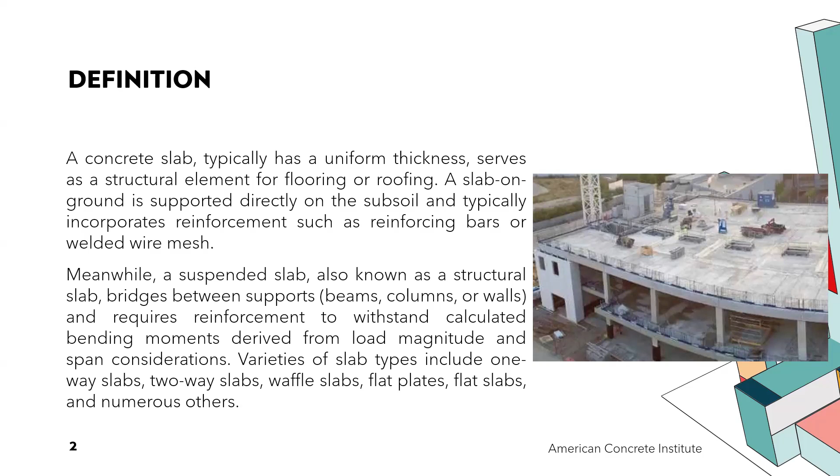There are two major categories of slab based on the transfer of forces from the slab to the beam, and it occurs either in one way or two ways. This is based on the geometrical dimensions of your slab. A slab may also be supported by columns only, and in this case, two-way action will prevail.

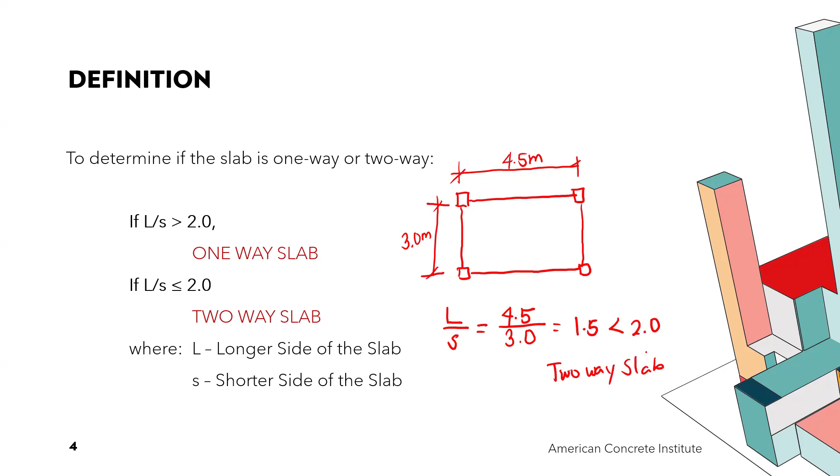Okay, so ganyan natin siya dinedetermine. And about this load transfer from the slab papunta sa beam is ganito. Again, triangular sa ating shorter side, and trapezoidal naman papunta sa longer side. Okay? So this is what we call our two-way slab.

So very simple yung ating pag-determine kung one-way or two-way. So after knowing this, I think we can proceed now with the designing of our slab. So pag design natin yung slab, there is a difference between the two, sa one-way natin and then two-way. So we will start in the designing of one-way slab.

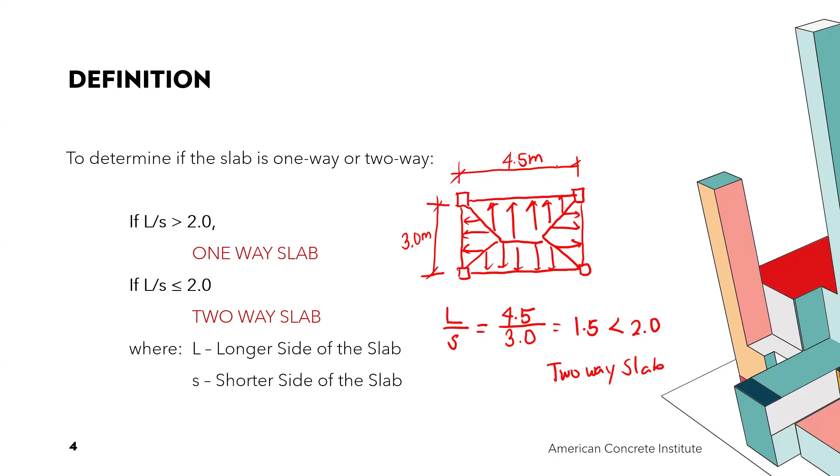Here is the general steps in designing of one-way slab. Number one, first is we need to compute the designing moment or Mu. This will be the most important parameter that we need to compute so that we can design our slab. Of course, kasi if we don't have the moment, then we cannot design yung ating slab.

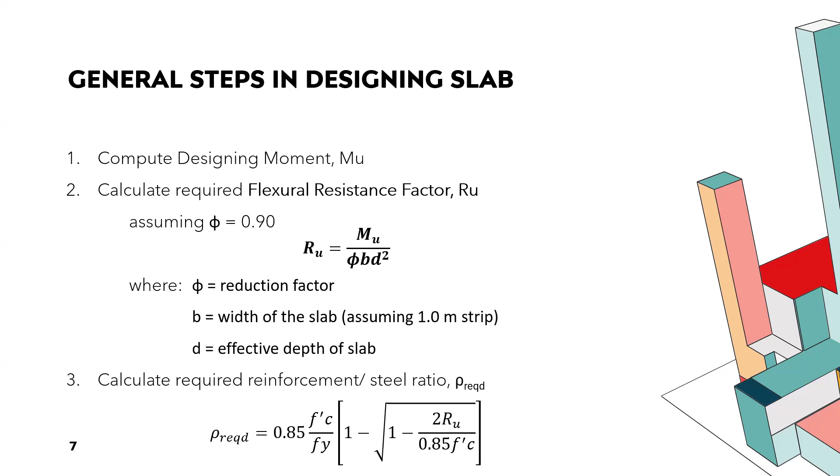Then after that, compute the required area of reinforcement, or yung As required natin. As required can be computed by multiplying yung rho required times yung ating width times the effective depth ng ating slab. Then compute the minimum area of reinforcement, As minimum.

So ang As minimum natin for one-way slab ay it depends on the type of reinforcement na gagamitin natin and also the value ng ating Fy. If Fy is less than 420 megapascal and we're using a deformed bar, so yung As minimum natin ay 0.0020 times Ag, o yung gross area ng ating slab. Considering yung gross area ng ating slab, we will consider 1 meter strip pa rin.

Then for the deformed bar or welded wire reinforcement, let's say greater than a stress of 420 megapascal, there are two As minimum, and kung yung mas malaki sa kanila, yun yung mag-governing as minimum reinforcement. So yung As minimum, yung una, that is 0.0018 times 420 megapascal times Ag divided by Fy, and other one is 0.0014 Ag. So if As required is greater than the As minimum, then we will use the As required.

Otherwise, use As minimum. Then after determining the area of reinforcement, we will compute now for the spacing ng ating reinforcement. So to compute the reinforcement spacing, that is Abar over As required, then multiply by 1,000. Then after determining the spacing, we can round off your value.

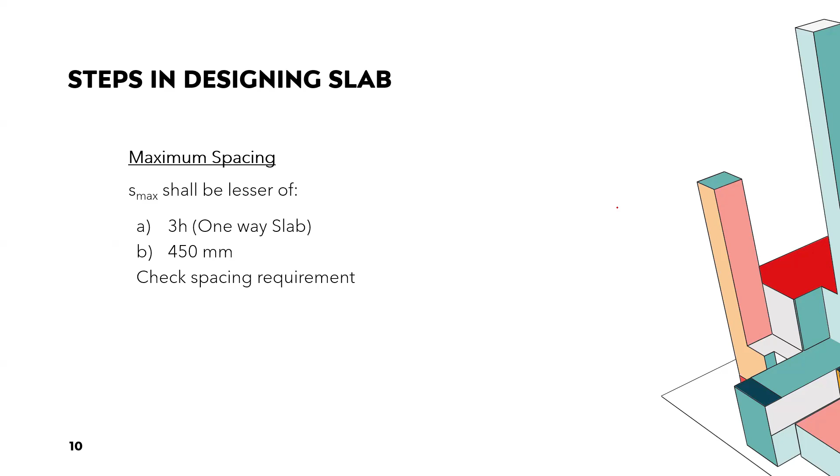Aside from that, since our reinforcement is along the direction of the bending of our slab, how about the longitudinal direction, parallel to the longer side? We need to provide minimum shrinkage and temperature reinforcement. This reinforcement is provided perpendicular to the main reinforcement of the one-way slab, with minimum ratios of the shrinkage and temperature reinforcement area to gross concrete area.

Actually, these are the same as our minimum reinforcement requirement for one-way slab. Commonly, we just use the minimum for shrinkage and temperature, unless we conduct analysis on the longitudinal direction of the one-way slab. But commonly that doesn't really happen, so we will just provide minimum reinforcement.

It depends on the diameter of your reinforcing steel bar, then from that we determine the required spacing. So after determining the minimum requirement of your reinforcement, we check its spacing, and the computation of the spacing will be the same as the previous criteria, similar to the main bar reinforcement.

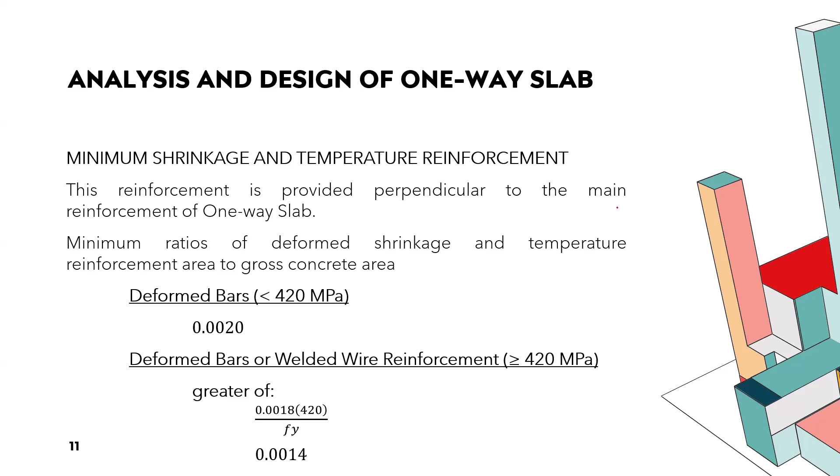Aside from designing the one-way slab, we will consider this to simplify the calculation of your design moment. Because it is very hard to compute the moment when dealing with slabs, especially if the slab dimensions are almost the same but there's a very small discrepancy between the width of the slabs and they are adjacent to each other. If we analyze it the way we learned from theory of structures, it becomes tedious and very difficult.

So NSCP provides us a simplified and approximate method of analysis of continuous beam and one-way slab. This is the requirement or the rules for using the NSCP coefficient method for continuous one-way slab. What we will design here is more focused on continuous one-way slab. It shall be permitted to calculate our Mu due to gravity load.

The gravity loads being referred to here are two: the dead load and the live load. So instead of using the analysis of continuous beams we learned in theory of structures, we will use this method instead. But make sure that the rules are satisfied before we conduct this NSCP coefficient method.

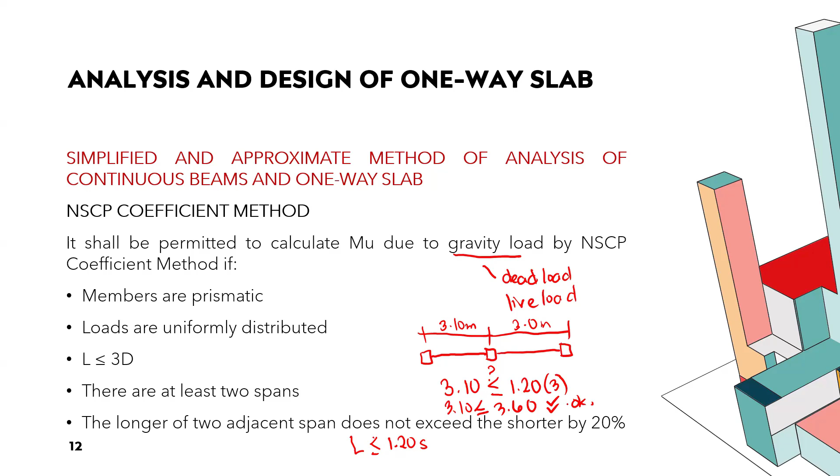Then here is the NSCP coefficients na gagamitin natin sa pag-calculate ng ating MU due to gravity loads. So in accordance with table 406.5.2 ng NSCP 2015, meron tayong two categories muna for the moment: positive and negative moment. Alam naman natin sa continuous beam, ang possibility ng ating moment ay ganito, parang curtain. So meron tayong positive na tinatawag at meron tayong negative moment.

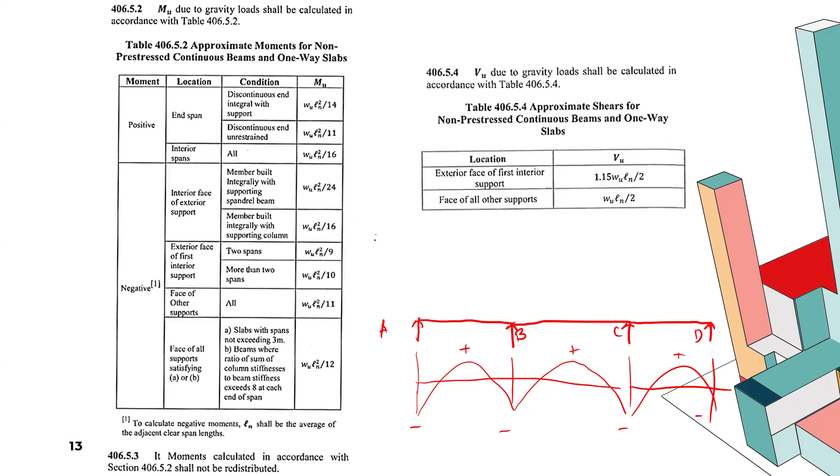Sa pag-calculate, una, sa positive moment, meron tayong dalawang kinoconsider na location: end span and interior span. Pagka sinabi nating end span, siya yung nasa outermost side ng ating continuous slab. For example, if I add one more slab here, let's say A, B, C, and then D. So masasabi natin na yung mga end span natin dito ay yung span AB and CD, sila yung nasa outermost side, itong AB at itong ating CD. Samakatuwid, yung BC naman natin ay interior span na siya.

Based sa condition ng kanilang support, pagka end span, sa end span lang naman meron tayong two criteria about the condition of the support. Una, discontinuous, at integral with support. Ibig sabihin, kasi sabi kasing integral is connected, meron connection between the support at yung ating slab based on their reinforcement. Kapag ganun yung ating design, so most probably ganun naman ang design natin, they are integral with the support. Yung ating slab is supported by the beam at yung ating reinforcement naman ay pinapakain doon sa ating beam, so therefore we will consider that integral with support. Pero pagka sinabing unrestrained, walang connection between the support at yung ating end span.

So yung gagamitin natin kapag integral with support ay WL squared divided by 14. Pagka unrestrained naman ay over 11. Then pagka interior span, sa lahat ng span, yung formula ng positive moment ay WL squared over 16. Okay, next dito tayo sa negative.

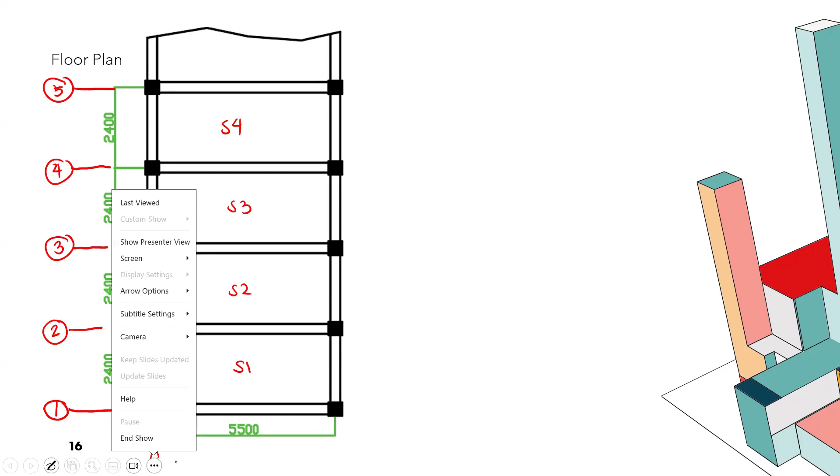So let's take a look sa ating floor plan. As you can see, this consists of many slabs. Let's name it as S1, slab 1, slab 2, slab 3, and slab 4. And let's create a grid here, naming grid A, or let's say grid B, or let's say grid 1 na lang. That is a conventional way of naming the grids of the framing of our floor plan. This is your grid 1, grid 2, grid 3, grid 4, and grid 5. And let's say this is your grid A, and this is grid B.

Okay, so first is we need to determine if it is really one-way slab or two-way slab. As you can see here, S1, S2, S3, S4 have the same dimension. So yung slab natin has a shorter side of equivalent of 2.4 meters, or let's say 2.5. Then for its longer side, it's equivalent to 5.5 meters. So to determine if it's one-way slab or two-way slab, let's check the value of L over S. Yung L natin is 5.5 divided by yung S natin na 2.4. So let's see if it is one-way slab or two-way. The value here is 2.29. So that is greater than the 2.0. So therefore, this is one-way slab talaga.

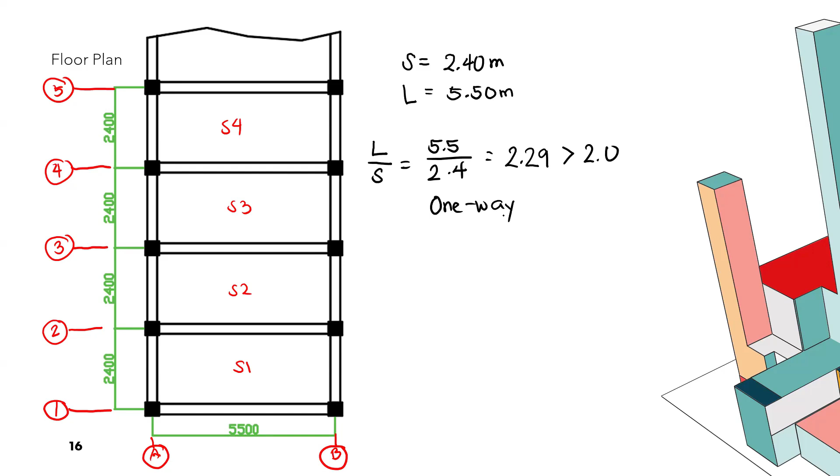Okay, next is, ang goal natin is to create a 1-meter strip, kasi yun yung ating magiging basis how to design yung ating one-way slab. So we will create a 1-meter strip that is parallel to shorter side. And since yung ating slab is a continuous one-way slab, so ganito siya. So mag-create tayo dito ng 1-meter strip.

Okay, and 1. So this is your 1 meter strip. Since this is a continuous beam, as you can see here in our floor plan, ito yung para magiging beam natin. This is the top view of your beam.

So if we try to draw it into a continuous one-way slab, ganito mag-itsura niya: 2, 3, 4, and 5. Ito yung 2.4, 2.4, 2.4, and 2.4. And ito yung frame 1, frame 2, frame 3, frame 4, and frame 5. So ganyan yung magiging longitudinal section niya, yung kanyang elevation, let's say elevation view, para mas maintindihan natin.

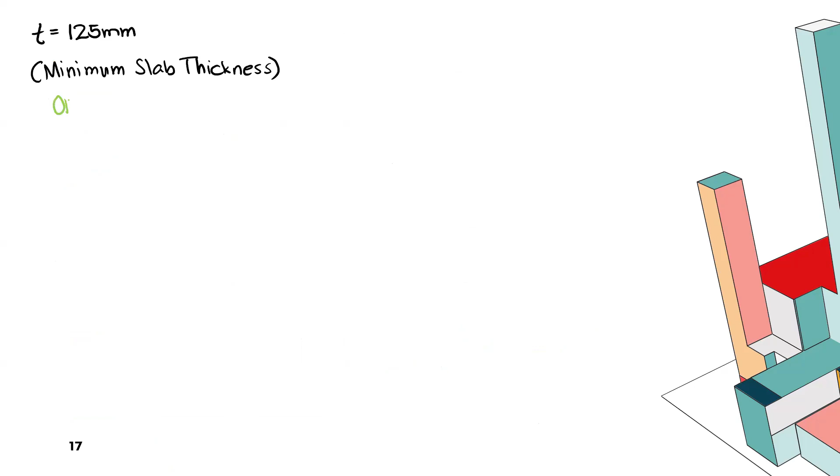So as you can see, there are two criteria dito sa ating slab, continuous slab. So we need to consider yung two conditions. Yung ating one end, ito yung S1 and S4. So dalawa, no? Dalawa yung ating one end continuous. Tsaka sa both end naman, dalawa din, no? S2 and S3 naman.

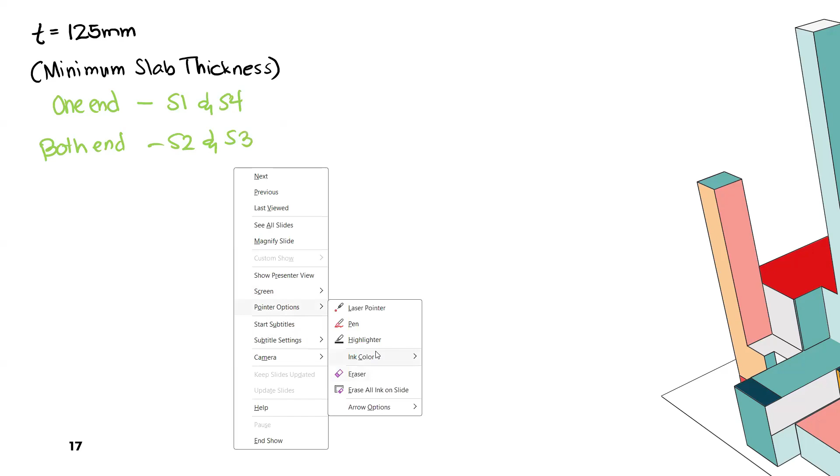So sabi natin, yung formula natin ay, balik tayo doon ulit sa code. Ang sabi natin, kapag one end continuous, that is L over 24, and then both end naman ay L over 28. Then sabi sa atin, this is applicable kapag ang Fy natin ay 420 megapascal. If you remember, yung ating Fy ay 415, so other than 420. So dito tayo pupunta. We need to multiply yung ating formula na to by this factor.

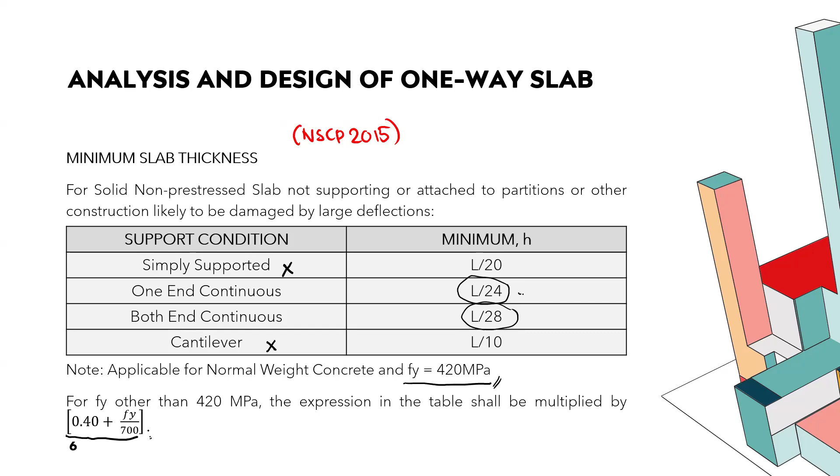Punta tayo dito, balik tayo dito sa ating calculation. Sabi natin yung minimum H dito, that is equivalent to L over 24. But since yung ating Fy natin ay 415 megapascal lang, mumultiply natin siya by 0.4 plus Fy over 700. So dito naman sa both end ay L over 28, times 0.4 plus Fy over 700.

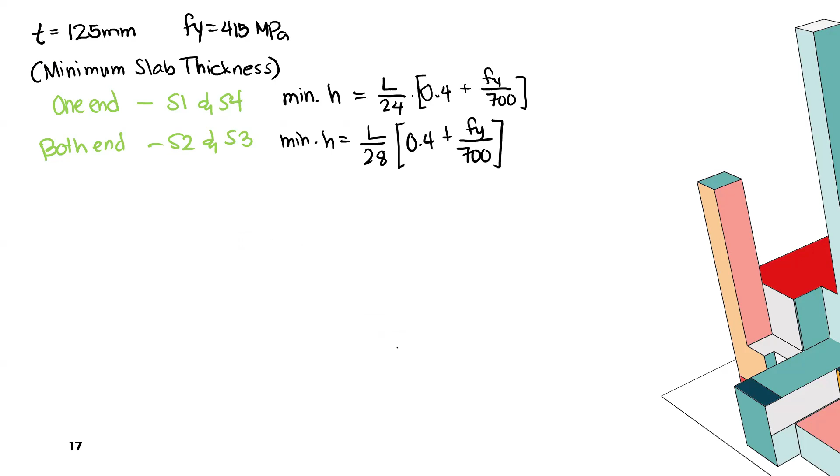Okay, next. Ano yung gagamitin nating L dyan? Yung L dyan na gagamitin natin ay ito ay clear span of the slab. So as you can see here, yung ating S1, S4, S2, S3 ay pare-pareho lang naman ng span. Yung span na tinutukoy is yung shorter side, ha? So lagyan natin na shorter side. Since pare-pareho lang naman yan, we can compute yung ating clear span of all our slab. So ganito ang pag-compute niyan.

So as you can see here, ang ating dimension is center to center of the beam. Dito siya sa center. Ang kailangan natin makuha is yung span natin dito, yung from the face of your beam support. Ibig sabihin, we need to deduct itong kalahati ng ating beam on both sides.

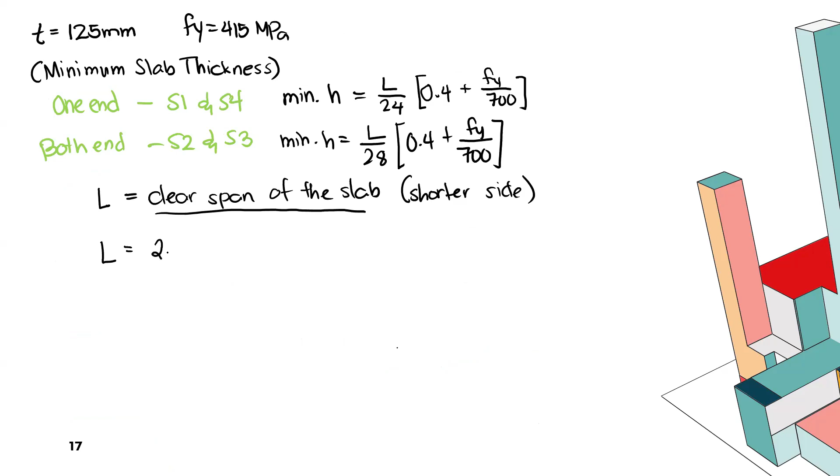So therefore, yung ating clear span, since pare-pareho yung span natin ng shorter side, yung ating center to center distance, that is 2.4 meters, di ba? Then minus yung kalahati ng beam natin. Saan ba yun? Di ba may given tayo na beam dimension sa ating problem? Yung cross-section niya is 300 mm by 500 mm. Kung titingnan natin yung floor plan, ito yung tinutukoy na 300 mm, that is the width of your beam.

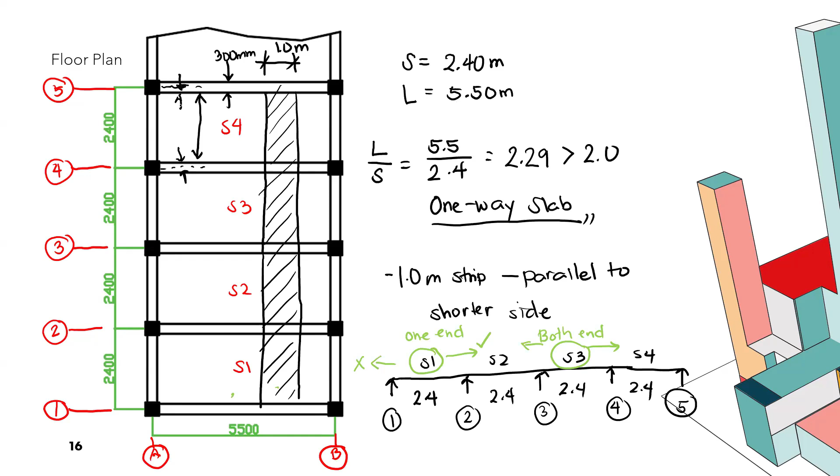So kung gagawin natin, kukunin natin yung clear span. Ima-minus natin yung dalawang half, dalawang kalahati, kasi center to center ito, di ba? Half ito, then on the other side ay half lang din. So 2 times half. Yung width ng beam natin is 0.3 meters, converted na siya, kasi 300 mm, yung ating beam dimension converted into 0.3 meters.

So, divided by 2. Two sides kasi, yung half, kaya ganyan. Pero to simplify, pwede nyo naman i-cancel yung 2, so just simply minus yung ating half width or yung width ng ating beam. Pero for the sake of correct calculation, ganito yung gagawin natin: yung ating clear span of the slab, that is 2.4 minus 2 times 0.3 divided by 2. So that is equivalent to 2.10 meters. Ito yung gagamitin natin for one end and both end.

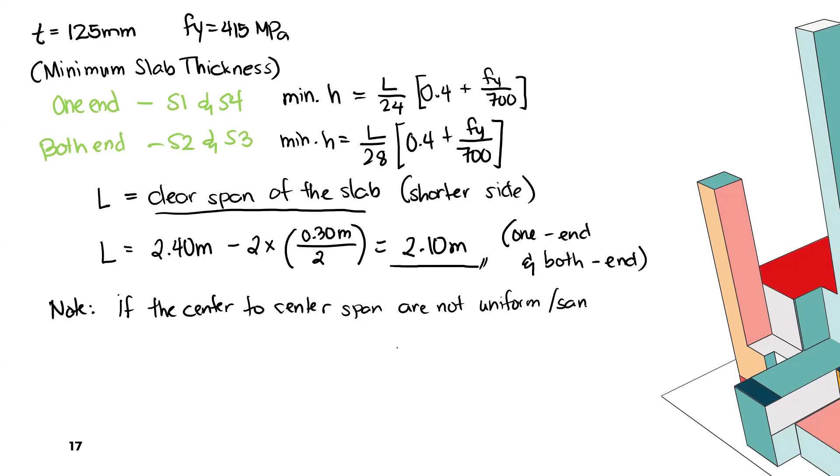How about, sir, kapag magkakaiba yung kanilang width? Magandang gawin dyan is use, lagyan natin ng note: if the center to center span are not uniform or same, use the higher value. Because higher value will give us a higher value of minimum. Kasi nga, yun ang gusto natin makuha, yung minimum slab thickness.

So let's check if papasa kaya siya o hindi. One end muna tayo. Compute natin yung one end, so that is equivalent to, yung H natin, gawin natin siyang mm: 2100 divided by 24 times 0.4 plus 415 divided by 700. So the value of the minimum thickness for one end is 2100 divided by 24, ito ay 86.875 mm. So very small lang, no? Minimum ito ha. Pero as you can see, yung ating actual thickness is 125. So minimum ito, so possible na pwede yan, yung 125.

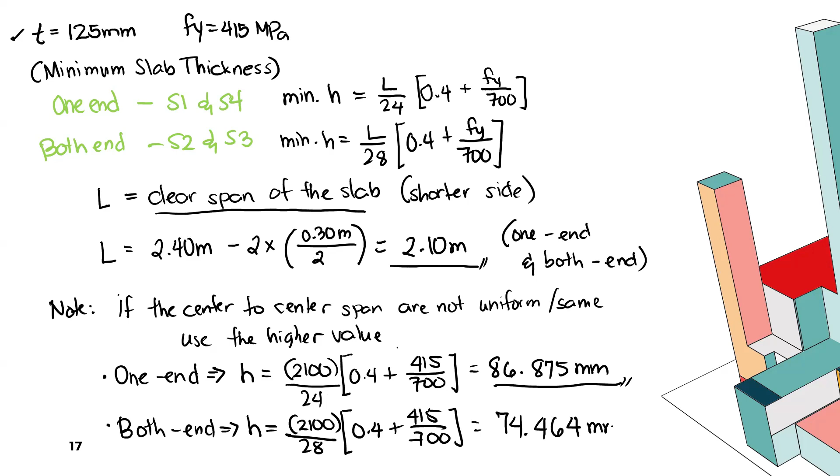Check naman natin yung both end. Baka sa both end naman magkatalo. Divided by 28 times 0.4 plus 415 over 700, let's see if there's some changes with the value. So this is 74.464 mm. Yung mag-govern sa atin na minimum dito, since dalawa yung value na minimum natin, ay yung pinakamataas. Mag-govern itong higher value. So therefore, lalagyan natin na yung minimum slab thickness is equivalent sa 86.875.

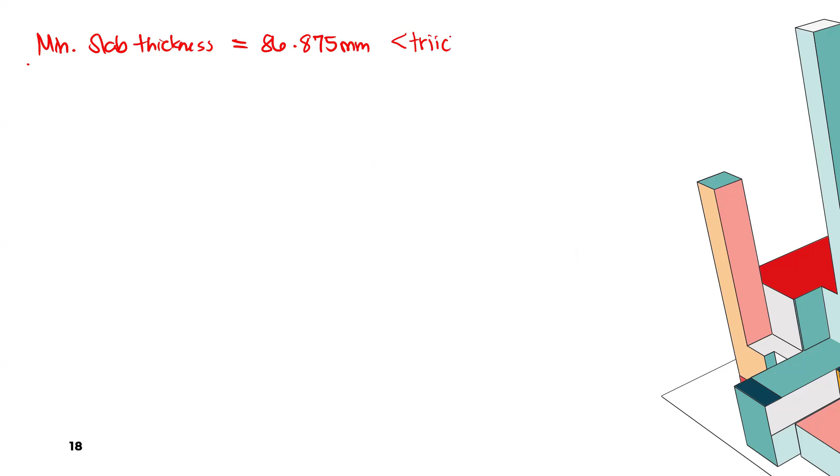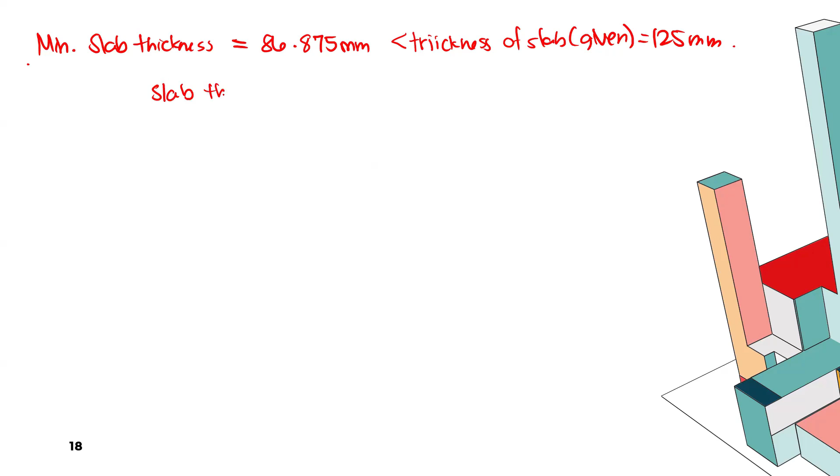And this is less than sa thickness, yung given na thickness ng slab natin. So wala naman tayong problema about sa thickness of slab yung given. Ito ay 125. So therefore, lagi natin, slab thickness, yung given, is adequate.

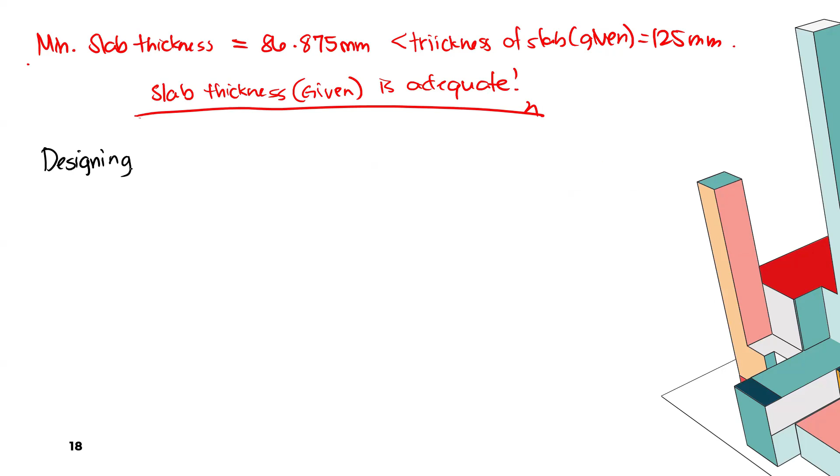Okay, so next, after natin dito sa pag-determine kung adequate ba yung thickness ng slab natin, then we can proceed now in the designing of one-way slab. Okay, in the designing of one-way slab, first, ano yung unang step natin? We need to compute designing moment, MU.

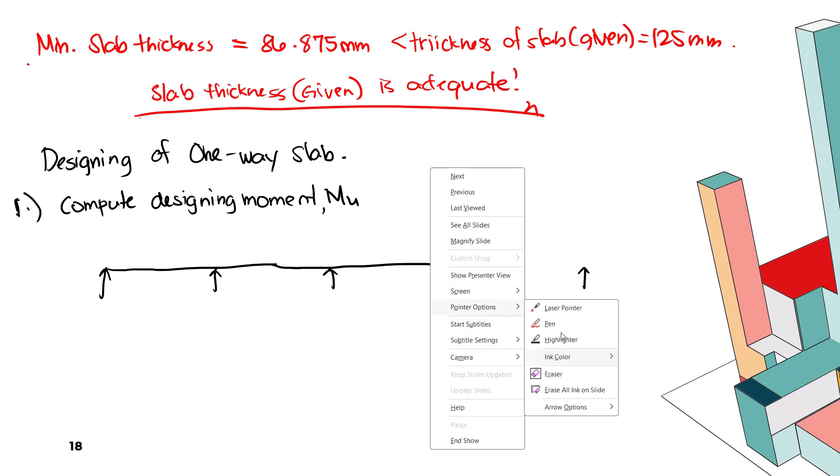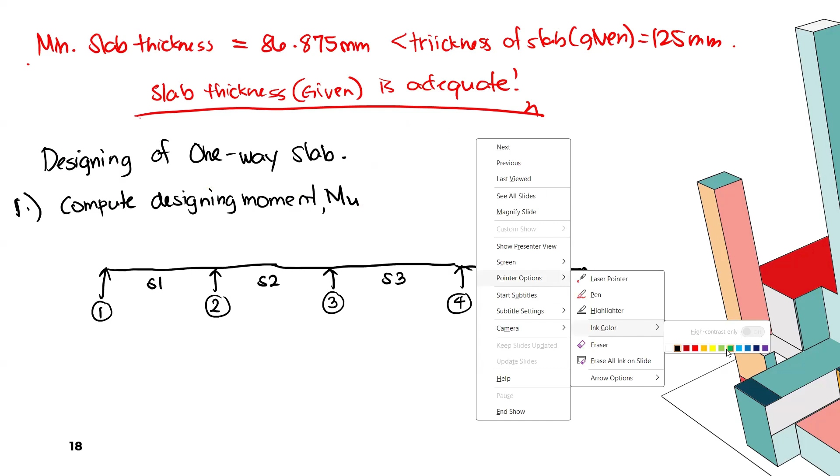Since we're dealing with a continuous one-way slab, let's draw continuous one-way slab. Drawing natin: this is here S1, S2, S3, and S4. This is your grid 1, grid 2, grid 3, grid 4, and grid 5. Next, yung kanilang dimension, lagay natin: this is 2.4, 2.4, 2.4, 2.4, that is center to center. Pero yung kanilang clear span, that is 2.1. So ito yung gagamitin natin pag-compute ng ating designing, yung ating clear span, hindi yung center to center. So this is just a guide para alam natin kung ano yung pinocompute natin.

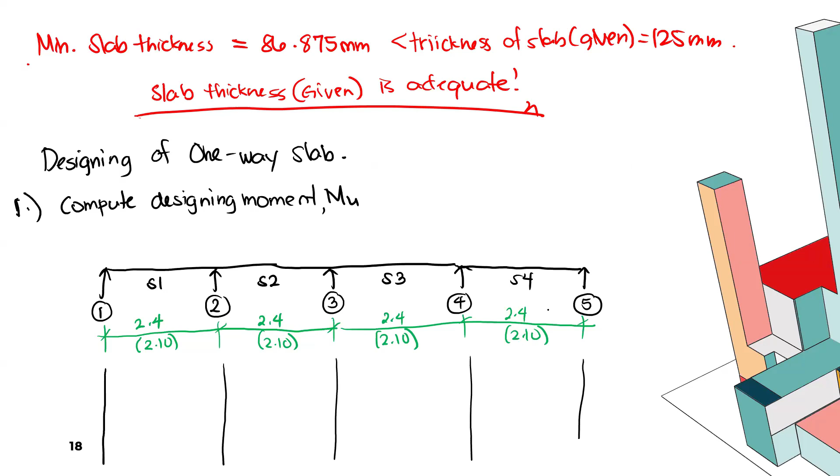Next is i-draw natin yung ating moment diagram. Ang gagamitin natin is NSCP coefficient. Ngayon, paano natin nasabi na pwede natin gamitin yung NSCP coefficient? Una muna ay pare-pareho naman siguro yung span nila. Pero di pa natin check yung iba, di ba? Una, prismatic, okay, pare-pareho yung span, okay. Di naman, wala namang longer side, walang shorter side sa ating span. So ang last na check na lang natin is yung ating dead load and live load. Pero for now, drawing muna natin ating moment diagram, assuming that yung ating beam is, yung ating end support ay integral, built integrally with our support. So ganyan yung ating magiging moment diagram.

Adjust lang natin para maganda yung tsura ng ating moment diagram. Ilalagay natin dito lahat ng ating diagram, yung ating mga moments. So, use natin dito, yan, and this one, and this one. Okay, ito yung ating moment diagram and pupunta na tayo doon sa ating coefficients.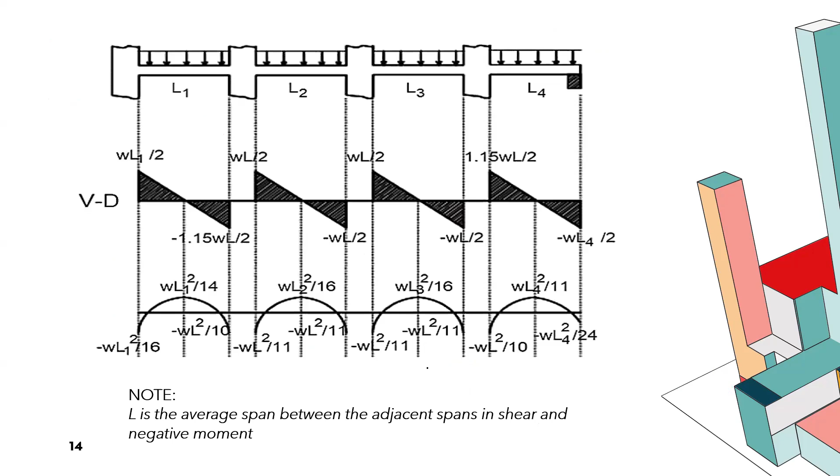Negative moment naman tayo. Una muna, interior face of the exterior support. So ito yung una, that is integrally with supporting spandrel beam. Commonly, beam naman yung ating support, no? So assuming that beam yung support natin, WL squared over 24 yung gamitin natin.

So ito yan, WL squared over 24. WL squared over 24, yan ha? Pareho naman yung exterior support.

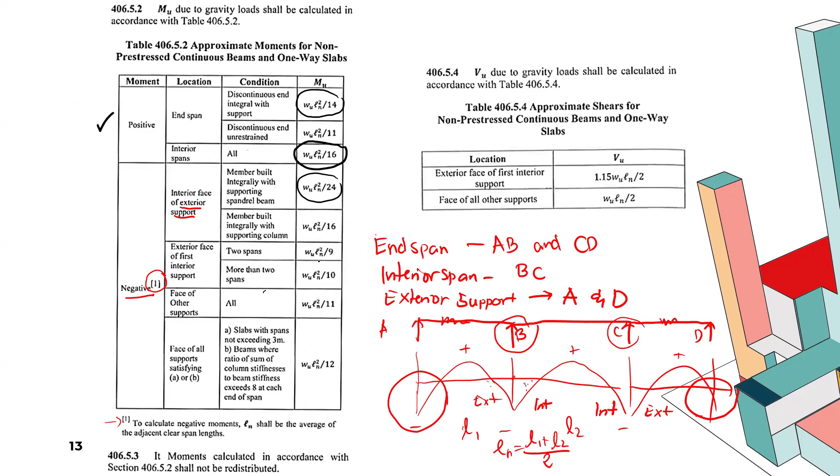Sabi naman dito, yung exterior face of the first interior support, 2 span, more than 2 span. So more than 2 span tayo, WL squared over 10. Lagyan natin, ito yan. Dito sa side na to, WL squared over 10, and WL squared over 10.

Face of other support, so WL squared over 11. Lahat na yan, no? The rest, tayo dito, may WL squared over 11. WL squared over 11, WL squared over 11, WL squared over 11. So yan.

Ito na yung magiging pinaka-formula natin, no, sa pag-compute ng ating designing moment. Ang gagawin natin, pipili tayo ng maximum positive and maximum negative moment. Then yun yung pag-design natin. But first, no,

Compute muna natin para mas maganda is compute muna natin yung ating W, kasi wala pa tayong W. Saan ba makukuha yung W natin? Okay, so yung W natin, let's say WU, that is a factored, uh, factored load. So makukuha yan by multiplying yung capital W natin times 1.0.

So ito yung 1 meter strip na tinutukoy ito. 1 meter strip, ito naman ay tinatawag nating pressure load. Ito yung mga given loads kanina sa ating problem. So we need to compute yung capital W natin.

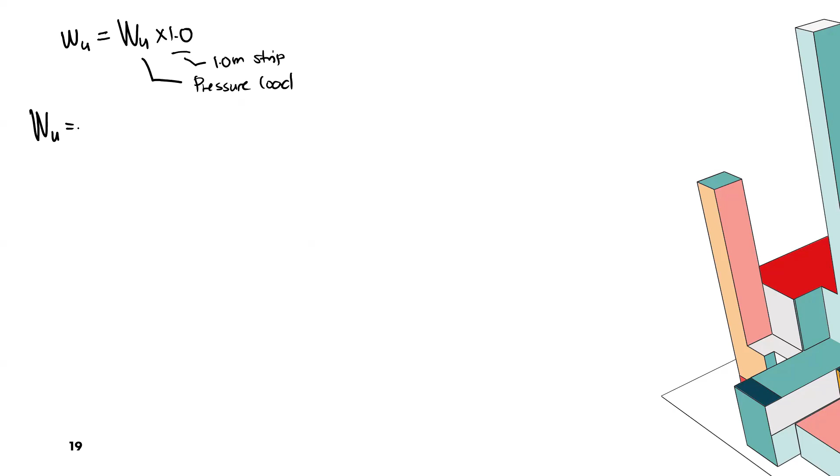Para mo compute to, mayroon tayong load combination ng 1.2 W dead load plus 1.6 of W live load. Since ang given naman sa atin ay dead load and live load, so yan yung load combination. So to compute muna, yung dead load muna natin.

Balikan natin yung problem. Sabi dito, slab is first floor office building. May live load tayo, 4.8 na, given na kagad. Then yung slab natin carrying ceiling system, interior wall partition, and floor finishes. So i-include natin yan, lagay natin dito ay 0.5 plus

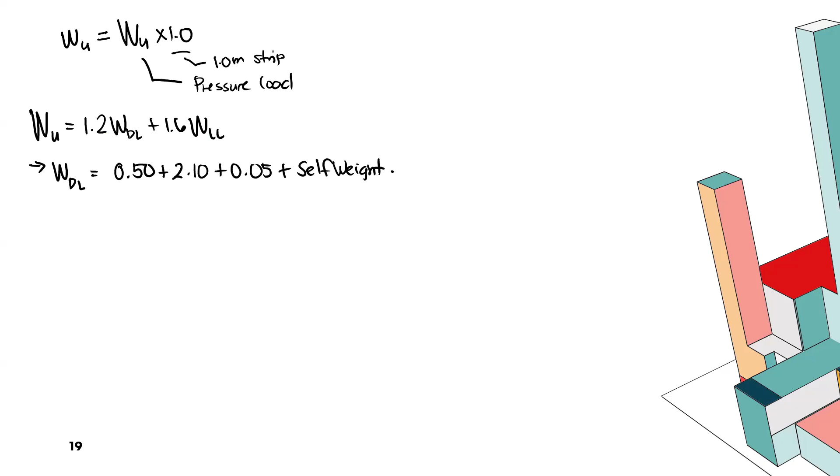2.1 and 0.05, plus 0.05. Then plus yung self-weight. Of course, yung ating slab ay may self-weight. So paano ba natin kino-compute yung self-weight ng ating slab?

Ganito natin siya kino-compute in terms of pressure load, ha. That is gamma of concrete times yung thickness of slab. Assuming that yung ating unit weight of concrete, that is 23.5 kilonewton per cubic meter for concrete, then multiply by thickness of slab. Ang thickness ng slab natin ay 125 mm, so divided by 1,000 na lang as a conversion factor. So yung value ng ating self-weight ay

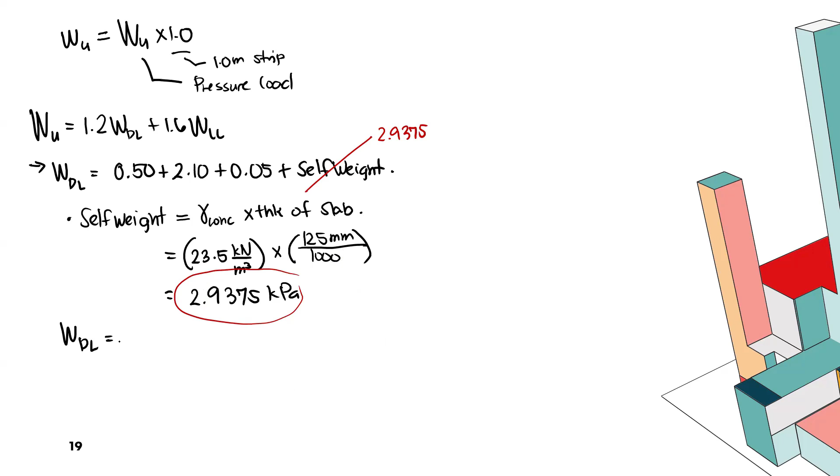2.9375 kPa. So substituting itong value ng ating self-weight ng slab, okay, lagay natin dito, 2.9375. So yung ating WDL, o yung ating pressure load ng dead load ay equivalent to 0.5 plus 2.1, so ay

5.5875 kPa. So meron tayong W dead load and given tayo ng W live load natin. Yung W live load, sabi naman ay 4.8 kPa. So after this, we can compute now for your factor W, yung pressure load. That is 1.2 times 5.5875 plus 1.6 of 4.8. So therefore, yung ating factored pressure load is

14.385 kPa. So ito yung gagamitin natin pang-compute ng ating WU na gagamitin natin. So yung WU naman, sabi natin that is WU times 1.0. So i-convert kasi natin yung ating pressure load into a uniform load. Since ang consideration natin sa pag-design ng one-way slab ay 1 meter strip, kaya i-multiply natin by 1 meter. So to remove yung isa yung pagiging kPa ng ating pressure load times 1.0. Actually yan na rin naman yung value that is 14.385 kilonewton per meter. So ito yung gagamitin natin na pang-design ng ating slab.

So let's proceed now to compute for the designing moment, MU. Sa designing naman, halimbawa, meron kang continuous slab. Ang totoo naman talaga, pwede mo siya i-design sa lahat ng moment na meron tayo. Kaya lang, it is inconvenient.

Halimbawa, balikan natin tong ating span. It is inconvenient na kumpitin mo yung MU, lahat ng MU, and then i-design mo siya for every MU. Kumbaga, there's a possibility na iba-iba yung design mo. Hindi pare-pareho yung number of reinforcement, iba-iba yung spacing. So parang ang pangit siyang tingnan and it is inconvenient for the workers or steelman or construction workers to set up those different spacing and different number of reinforcement.

So, pinakamagandang gawin is we will consider yung isang maximum moment, na positive, max positive moment, and max negative moment. Again, this is ang reason lang nito kaya ginagawa natin ito is for the workmanship and yung sa actual na pag-construct ng ating slab. Kasi inconvenient talaga kung i-design mo siya isa-isa. Pero kung gusto mo siya i-design isa-isa, walang problema.

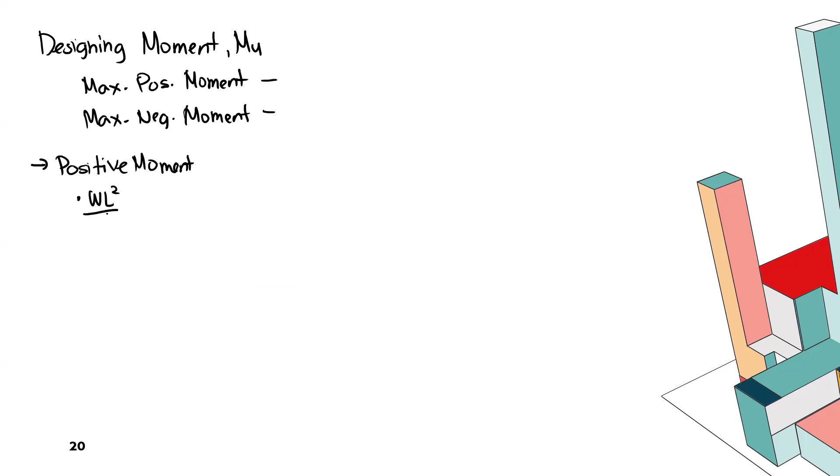So yung mga positive moment natin, meron tayong WL squared over 14 and WL squared over 16. So meron na tayong W. Yung W natin ay uniform naman, 14.385. And then yung L natin, yung clear span ang gagamitin natin. Yung clear span ay 2.1. Since pare-pareho lang naman, so wala tayong problema dyan. Then ito naman ay 14.385 times 2.1 squared divided by 16.

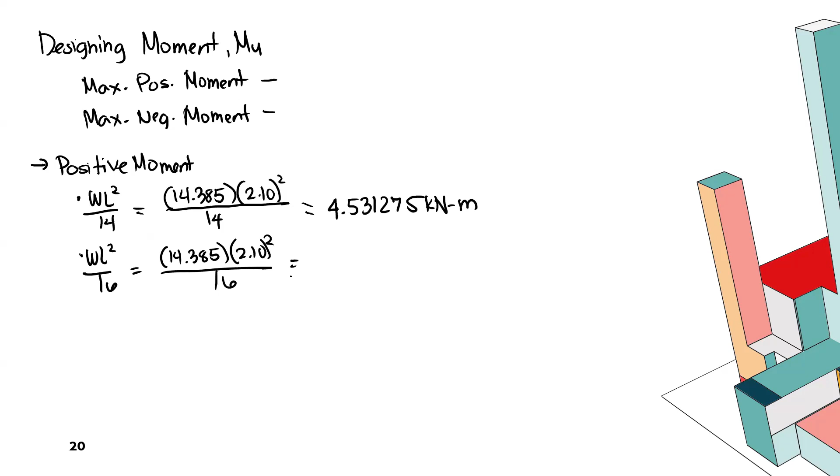So yung value ng ating positive moments ay 4.531275 kilonewton meter. Then, yung isa naman ay 3.9648666 kilonewton meter. So, yung higher value dito, obviously, ay 4.5. So, ito yung gagamitin natin ang design sa positive moment natin.

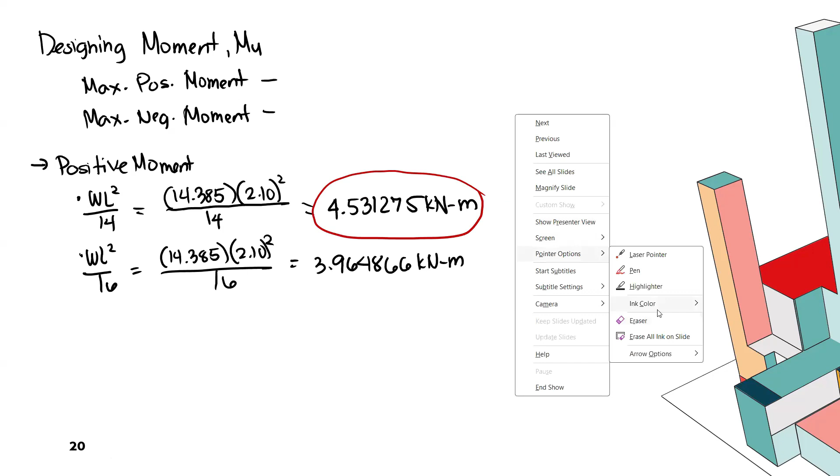So, next, compute naman tayo ng negative moment. So, yung mga negative moments natin ay WL squared over 24. Lagyan natin. Meron din tayong WL squared over 10. Saka WL squared over 11. And WL squared over 11.

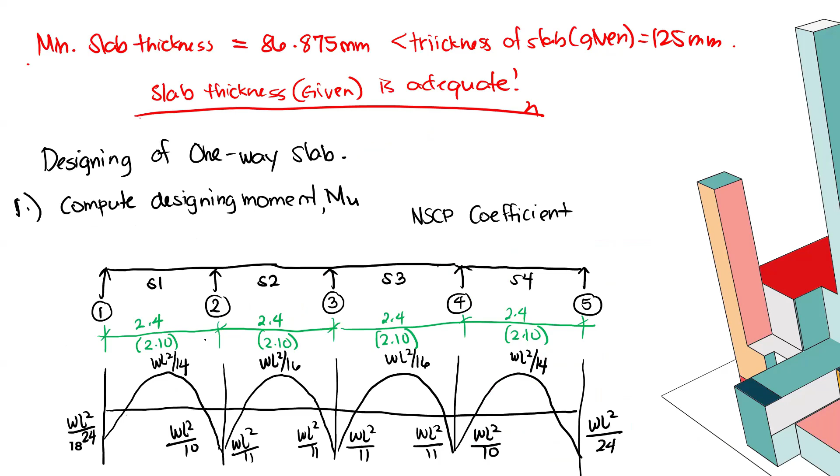So, compute natin kung ilan ang moment na ibibigay nito. Yung span natin dito sa end support, wala tayong problema, 2.1. In this case naman, yung L na gagamitin natin dito kapag yung moment natin is under interior support, so kukunin natin yung average ng adjacent span natin. Kaya lang, since yung adjacent span natin ay pareho lang, so yung L na gagamitin natin ay 2.1 pa rin, kasi nga pareho lang naman yung span.

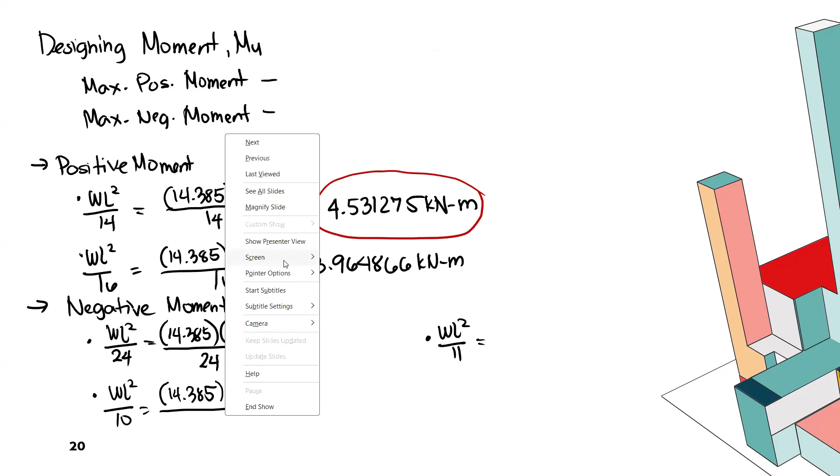Pagka magkaiba, so kailangan natin kunin yung average. So, let's say, lagyan na rin natin na kunwari nag-compute tayo ng average divided by, since pareho lang naman yung span on left and right side of our interior support. Divided by 10. And same scenario also for this moment na pareho lang naman yung span. So, kahit di ka naman mag-average, okay lang. Pero for the sake of the discussion, so lagyan natin ng average.

Therefore, yung ating mga moments na mako-compute ay 2.64324. Ito naman ay pababa, 6.343785. And yung isa naman ay 5.767 kilonewton meter. So yung ating maximum negative moment ay ito, 6 point something.

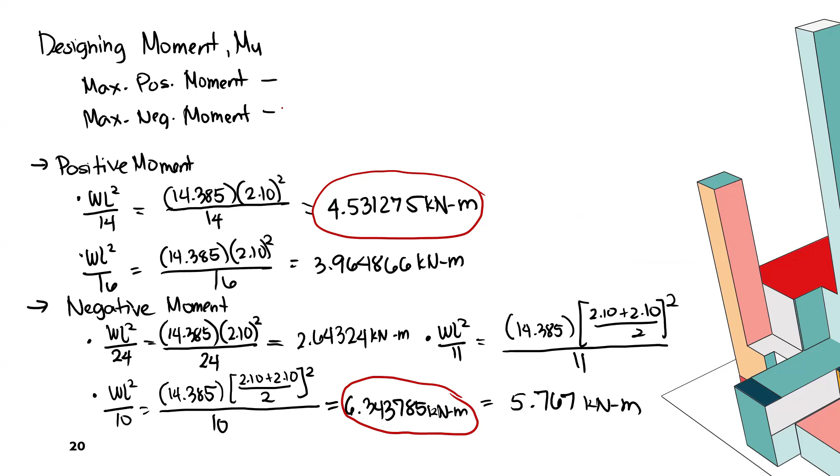So lagyan natin dito sa taas. Take-note natin: 4.531275 and 6.343785 kilonewton. Okay, so we are done with the first step.

Then, compute na tayo ng ating next step. Ang compute naman natin, number 2 ay yung ating RU, yung tinatawag nating flexural resistance factor, RU. So yung RU natin, compute natin using this formula.

So MU over phi BD squared. Assuming reduction factor natin ay 0.9. So, sabi natin, yung B natin dito ay 1 meter strip. That is equivalent to 1,000 mm. And the next is yung effective depth natin. The effective depth, pag compute natin effective depth, ganito. Ito yung slab natin. Yung thickness niya ay 125 mm. Then, syempre, maglalatag tayo dito ng reinforcement.

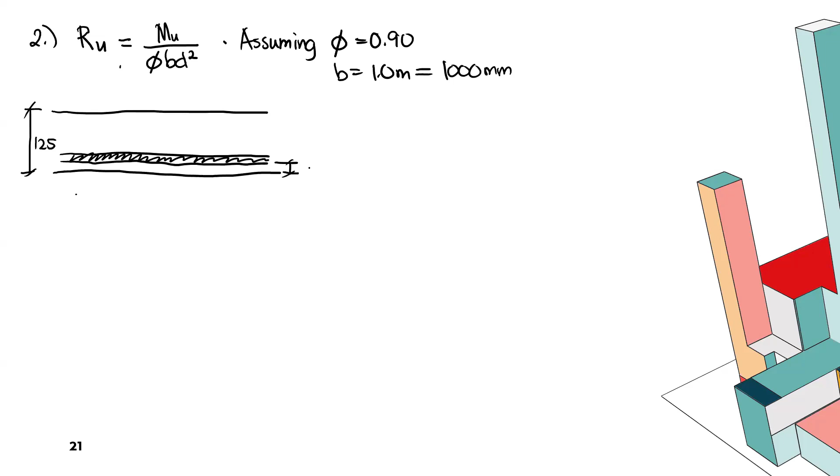So, ito yung reinforcement natin. Commonly, itong concrete cover natin, concrete cover, ang ginagamit nating concrete cover for slab ay equivalent sa 20 mm. That is a minimum value based from NSCP.

Then, sa reinforcement naman, wala tayong given diameter, no? So, lagyan natin ng diameter of reinforcement na gagamitin natin, assuming that diameter of your bar is equivalent to 12 mm, sa lahat na yan. All bars.

So, kung 12 mm gagamitin natin, so ito ay 12 mm. Sabi natin yung effective depth, that is the distance of your tension reinforcement from the extreme compression fiber of your concrete, from here hanggang sa center ng ating reinforcement. That is your effective depth. So, to compute now, effective depth D, that's equivalent to 125 minus 20 for your concrete cover minus kalahati ng ating reinforcing bar. So, that is equivalent sa 99 mm. So, ito yung gagamitin natin for effective depth.

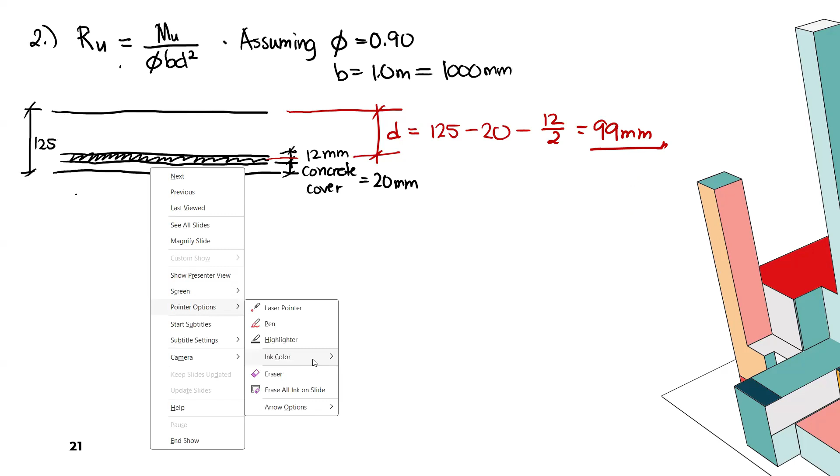Next, kumpitin naman natin yung ating flexural resistance factor, RU. Dalawa yung ating resistance factor, so sabay na natin kumpitin. Ito yung sa positive, and then meron tayo dito for negative. The positive RU, that's equivalent to yung positive moment natin, 4.531275, times 10 raised to 6, conversion yan para maging Newton mm, divided by 0.9 times yung width natin na 1,000 mm times yung D natin na 99 squared.

For negative moment naman, that is 6.343,785 times 10 raised to 6 divided by 0.9 times 1,000 times 99 squared. So, yung RU natin dito ay 0.51369,758. Okay, and sa isa naman, ito ay 0.7191766. Ito na yung RU natin.

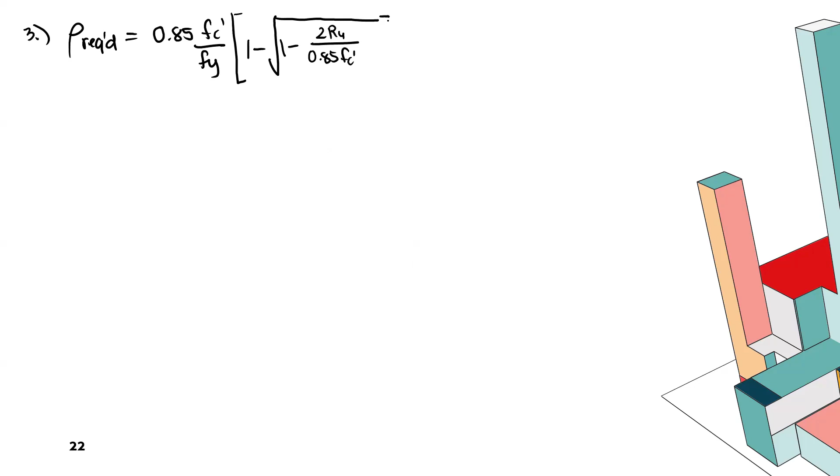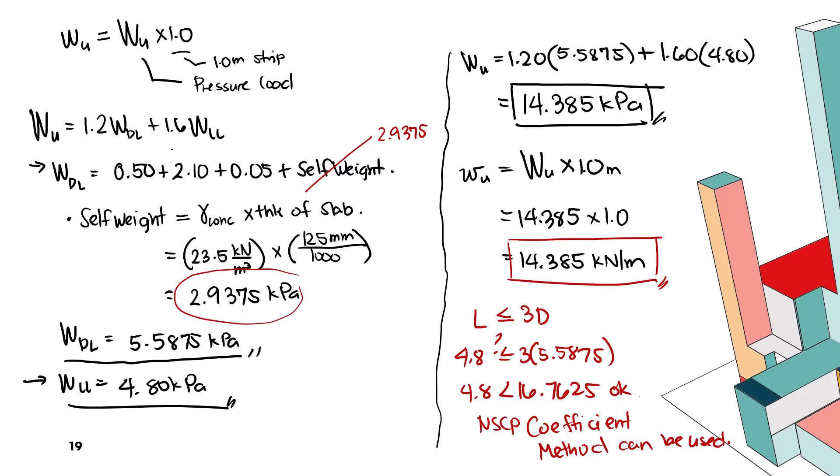So, dalawa, sabay natin kukunin for positive and meron tayo dito for negative. Yung rho required for positive is equivalent to 0.85, FC prime natin, is on the given ay FC prime 28 megapascal, Fy 415, over 415 multiplied by 1 minus square root of 1 minus 2 times yung RU natin sa positive ay 0.51369758 divided by 0.85 FC prime.

Then for negative naman, is 0.85 FC prime over Fy times 1 minus square root of 1 minus 2 times 0.791766 divided by 0.85 times 28. Okay, so therefore yung rho required natin ay ito ay 0.00125148. And yung isa naman ay ito ay 0.00175996. Okay, so meron na tayo na complete na required on both positive and negative.

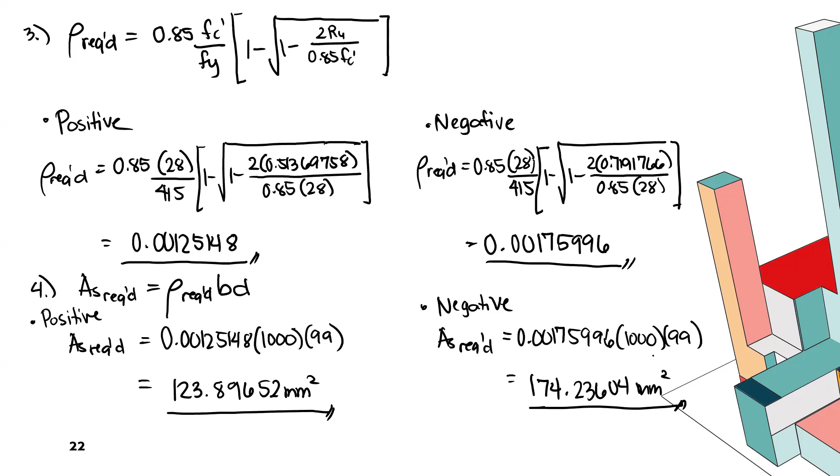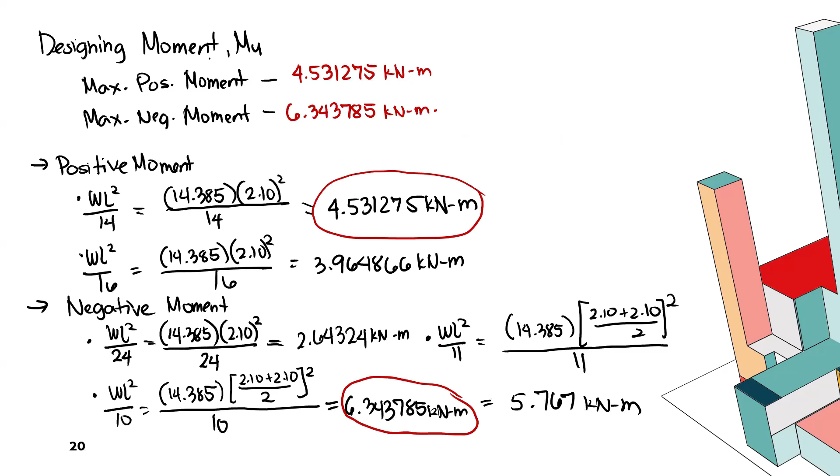Then, check natin siya sa minimum reinforcement. So, number 5, minimum reinforcement. Okay, so minimum reinforcement tayo. So, yung minimum reinforcement will govern on both positive and negative. So, balikan natin yung code. Ito yung ating minimum reinforcement. So, yung minimum reinforcement natin ay ito. So, for deformed bars less than 420 megapascal yung Fy. So, ito yung AS min natin, 0.002 AG lang.

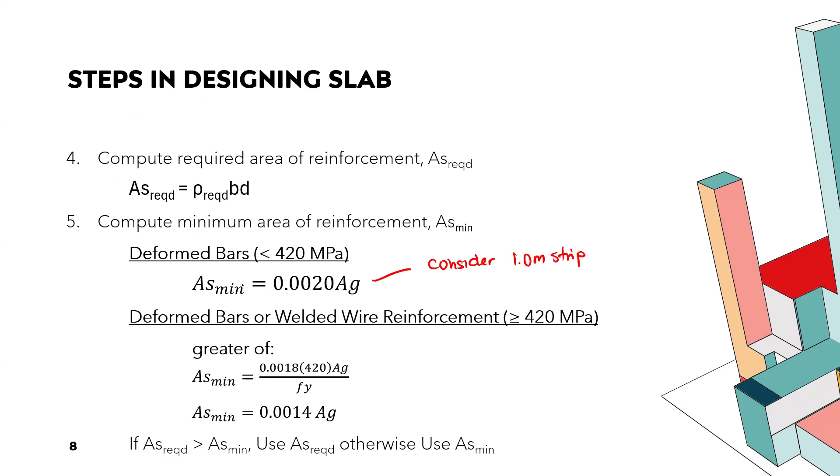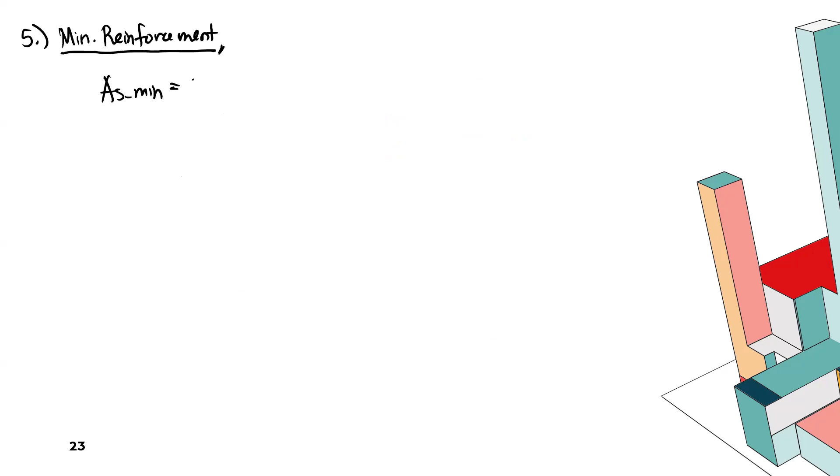So, AS min, 0.002 AG. Then, yung AG natin can be computed using B times H, so yung height or thickness ng ating slab. So, computing the AS minimum, this is equivalent to 0.002 times 1 meter strip times yung ating slab thickness ay 125. So, therefore AS min natin ay 250 mm squared. Ito yung minimum kailangan natin provide.

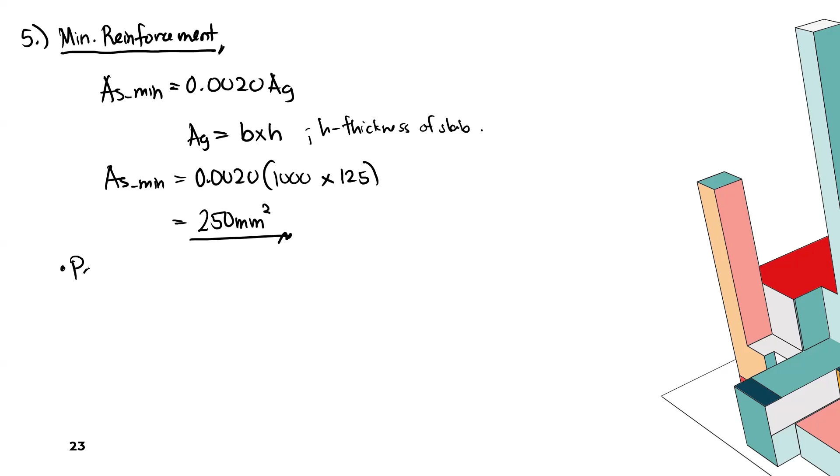So, to check in positive moment, yung AS required natin, tsaka yung sa negative, yan, negative. So, yung AS required dito, yan, yung AS required natin 123 lang. Doon sa kabila naman 174. So, this is less than the AS minimum natin. So, same also in this case, this is less than to AS minimum. So, therefore, use AS minimum as the required AS natin, that is equivalent to 250 mm squared.

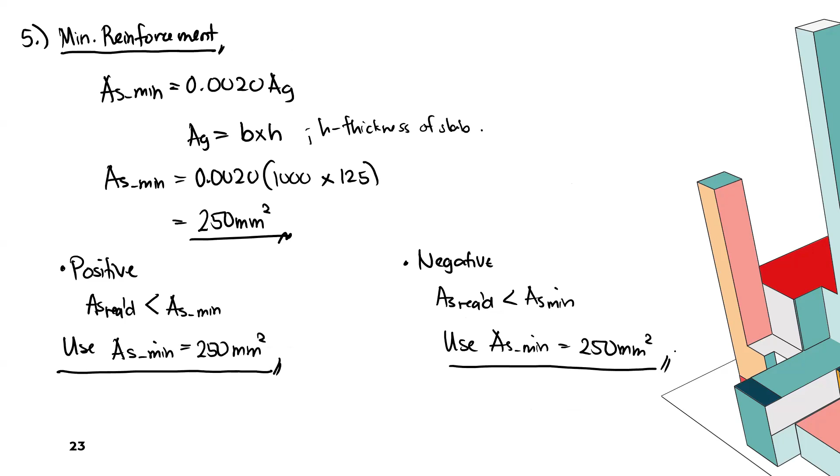Okay, next. After determining the AS minimum, then pwede na tayo mag-compute ng ating required spacing. Next, so to compute yung ating spacing, S is equivalent to A bar over AS times 1,000. So sabi natin yung A bar, that's the area of your reinforcement, so assuming that yung diameter ng bar natin ay 12 mm.

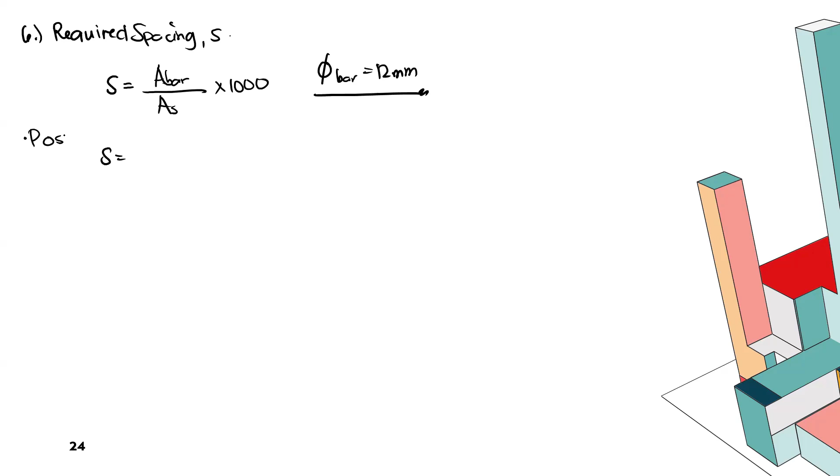So S is equivalent sa, so positive, both positive and negative. Actually, pareho lang naman yung positive tsaka negative natin, so wala tayong magiging problema, isa lang yung magiging sagot. Pero for the sake of discussion, discuss natin pareho. So pi over 4 times 12 squared divided by AS dito is 250, diba? Sabi natin use 250, multiply by 1,000. So ito yung ating spacing, negative, positive.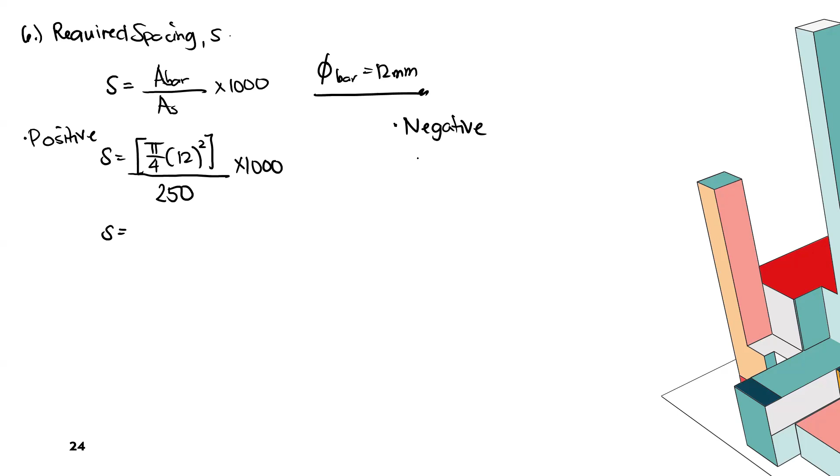And dito naman, for negative, divided by 250 times 1,000. Therefore, yung ating spacing, required spacing ay 452.39 mm. So, pareho lang din dito. After determining this required spacing, i-check natin sa check minimum spacing.

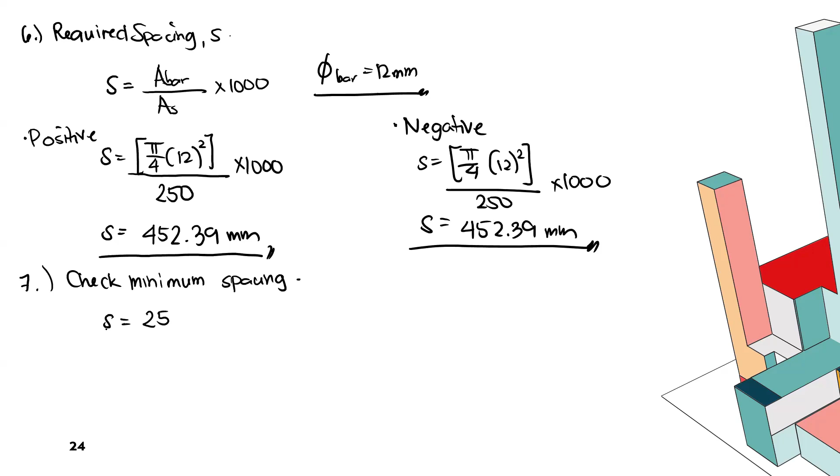Minimum spacing natin, sabi natin that is 25 mm, tapos dB which is 12 mm, then 4/3 of diameter of aggregate, assuming this value is approximately equivalent sa 25 mm.

So both positive and negative naman, sa lahat dito, these three ay greater than, or rather, they are less than sa S required natin. Yung S required natin is 452.39 mm. So therefore, okay siya for minimum spacing.

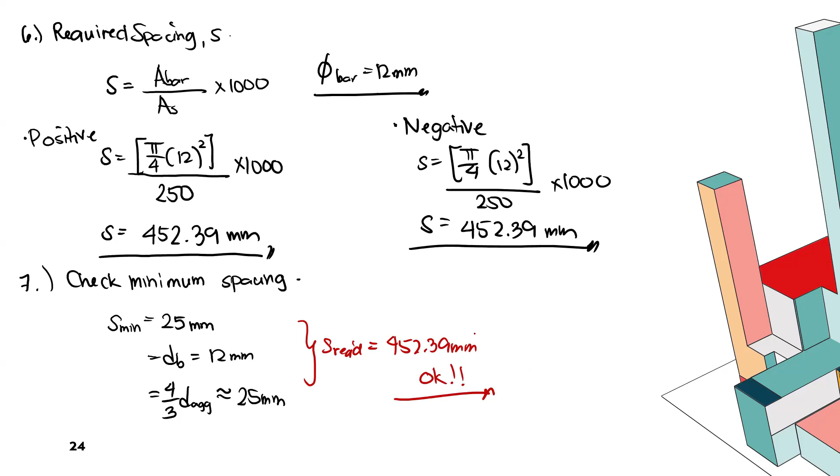Okay, next check natin siya sa maximum required spacing natin. Ang maximum spacing natin requirement, S max, that is equivalent to 3H tsaka 450 mm. Yung sa H natin, that is the thickness of the slab, that's 125. So this is equivalent sa 375.

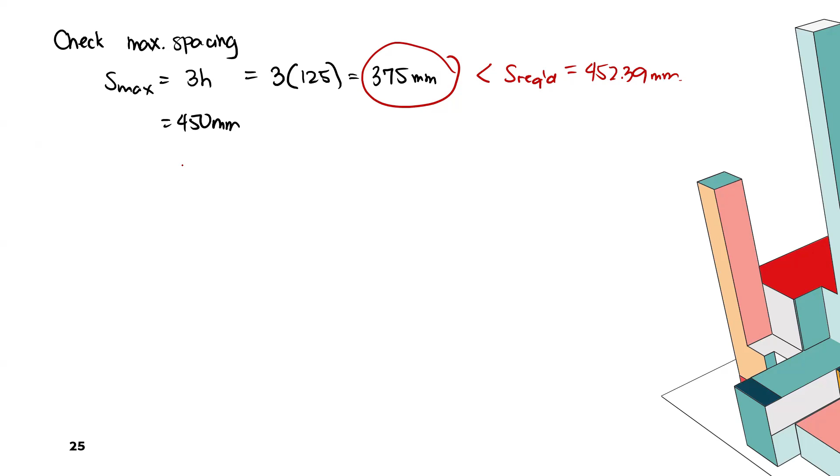Mag-govern sa S-max natin yung pinakamaliit, so ito yung mag-govern as S-maximum natin. Yung ating S-maximum ay less than sa S-required. S-required natin, that is equivalent to 452.39. So syempre, pagka maximum, hindi tayo pwedeng sumobra dyan, eh yung ating S-required ay sobra na. So therefore, ang gagamit nating spacing, so use S.

So ito, not okay ito, kasi nga sobra na yung ating required. So hanggang spacing lang natin ay 375 mm. So ito ay both positive and negative moment na.

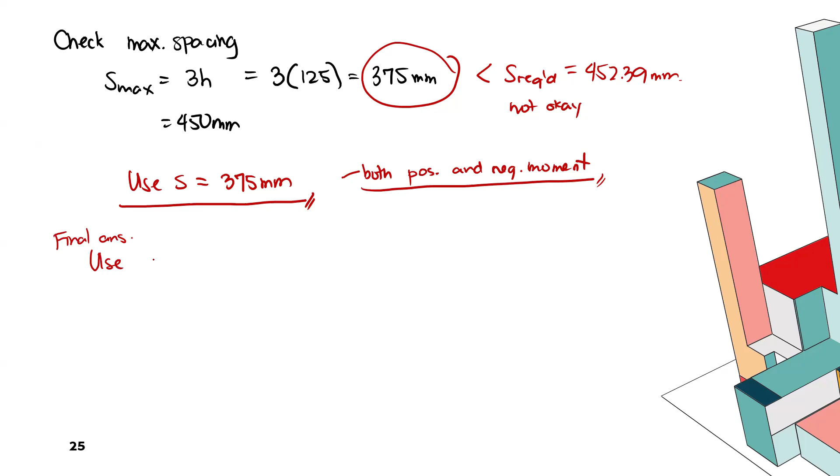Okay, so after checking the required spacing, then we are done already. Ang gagawin na natin, ilalagay natin ang final answer: use 12 mm diameter bar, space at 375 mm on center.

Okay, ito ay main bar. Lalagyan natin main bar, or main reinforcement. So ito yung final answer natin for this question.

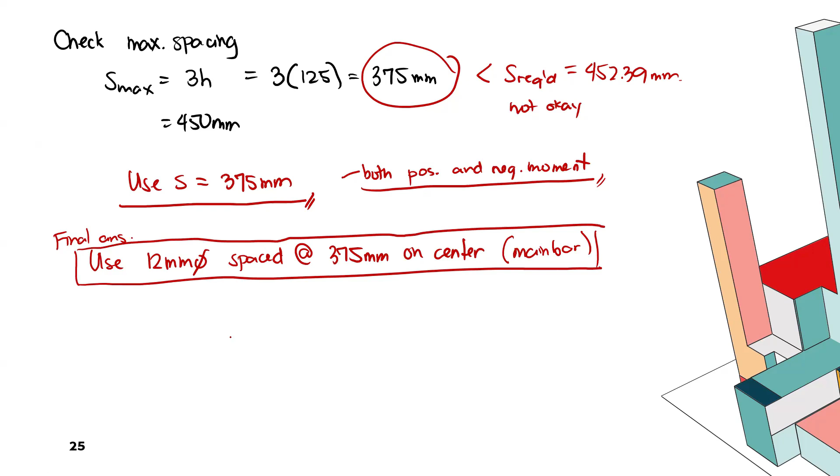But we're not yet done kasi kailangan natin mag-provide ng temperature bar pagka one-way slab. So we need to provide yung ating temperature bar. So ito yung main bar. Next, mag-compute naman tayo ng temperature bar.

Pag-compute naman ng temperature bar, pwede na tayo dumiretso sa AS temp natin or AS temperature bar. Ang pag-compute lang natin, using the minimum required reinforcement, 0.002 times AG, kasi since yung FY natin ay less than sa 420 megapascal, so yan yung gagamitin natin. Actually, they are the same. Dun sa gross area natin kanina, 1,000 times 125, so ito ay 250 mm squared.

So after computing that, we can compute now for the S temperature, required spacing for the temperature bar. That is A bar over AS temp times 1,000. Ito ay equivalent sa pi over 4 times 12 square, sabi natin pare-pareho na yung sizes ng ating reinforcement, tapos divided by 250 times 1,000. So therefore value natin dito ay pareho lang din dito, that is 452.39.

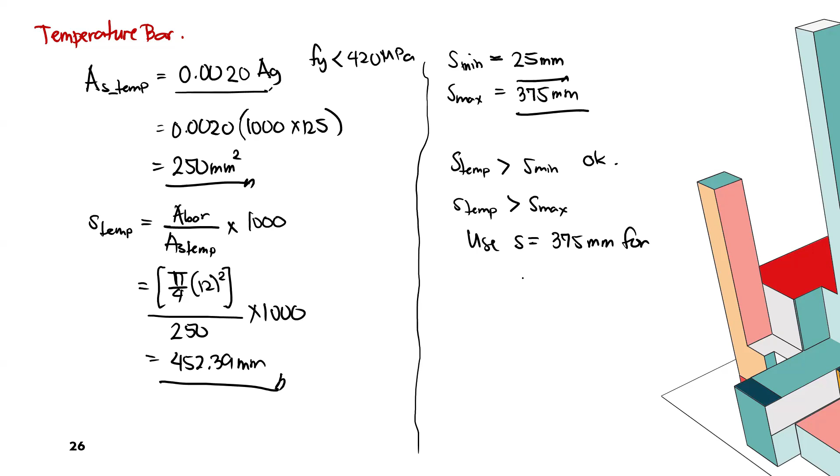Okay, so lagi lang natin, yung final answer, use 12 mm diameter bar, temperature bar, space at 375 mm on center. So ito na yung pinaka-final answer natin for the temperature, and this is the complete design ng ating one-way slab.

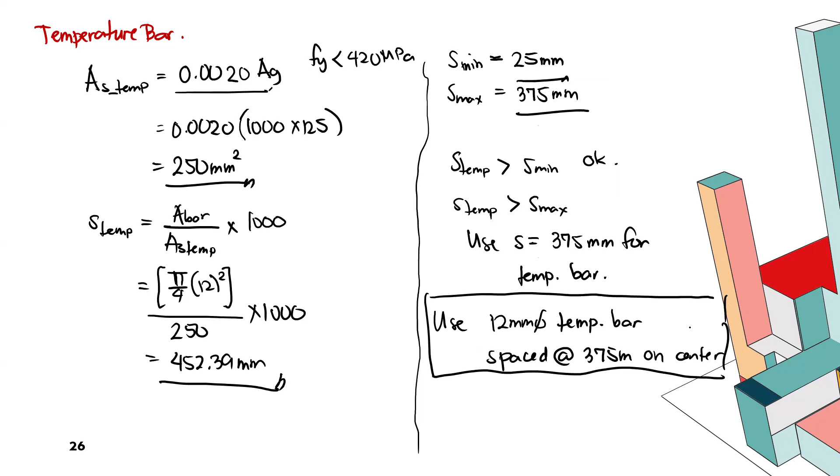Ganito. Ito hindi pa rin maganda. Okay, so ganito yung ating magiging reinforcement, at parallel lang naman yan.

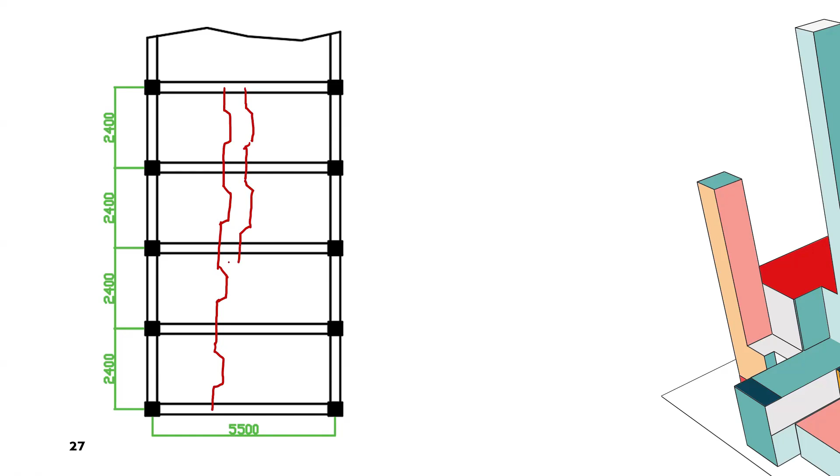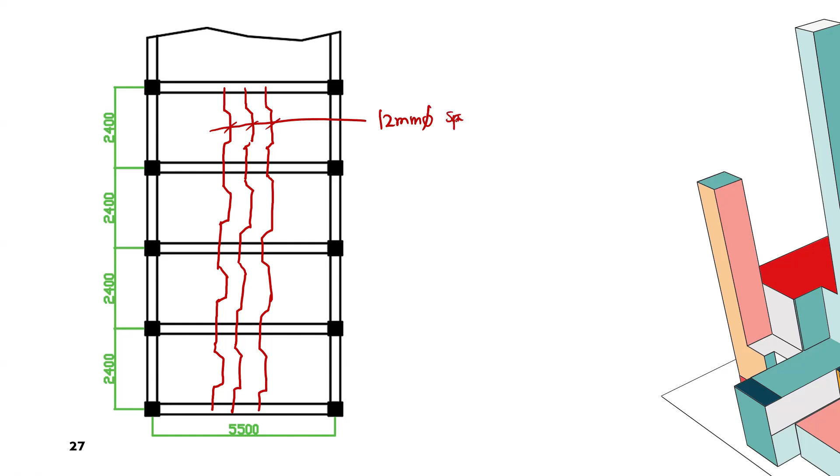Sabi natin yung spacing nito, ay at 375 on center. Yan, so lagyan natin siya ng ganyan. Hindi ko na-drawing lahat. So 12 mm diameter spaced at 375 mm on center, okay, that is the main bar.

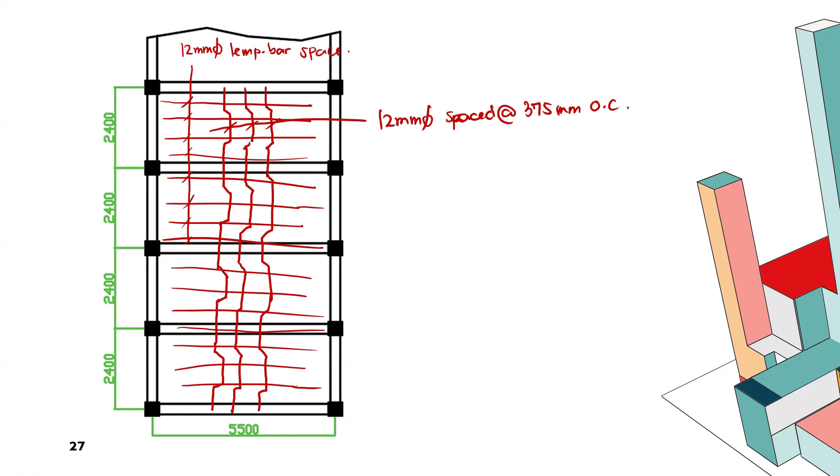At yung temperature bar naman, ganito, lalagay tayo ng baka na ganyan, all throughout na yan, temperature bar. Again, this is just representation lang, but this is not the actual or yung correct spacing, ito ay 12 mm diameter temperature bar, space at 375 mm on center. So this is now the final design.